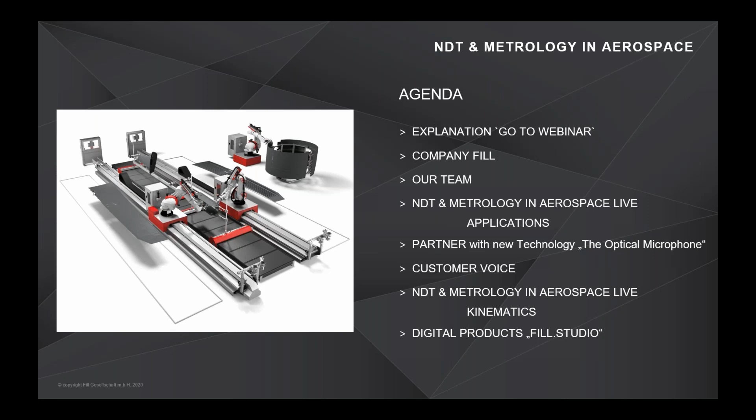Good morning. My name is Elisabeth Dötzlofer-Ferry. I am Sales Assistant at Fill, and we would like to welcome you to our webinar, Accubot-based ultrasonic X-ray inspection and geometrical measurement systems. In the next 60 minutes, we will show you the highlights of these systems. Before we start, we will explain the tool, briefly introduce the company, the team, and then we start with the presentation.

I would like to introduce our team before we start. Our specialist, Thomas Gramberger, will showcase today the highlights of our newest developments in automated NDT and metrology for aerospace. Balthasar Fischer, the CEO and founder of XARION, will introduce his unique alternative for dry inspection, the so-called optical microphone. And we are happy to welcome Jakov Sekelja from GKN Munich, one of our customers who is using an industrialized NDT system based on Accubot since 2018.

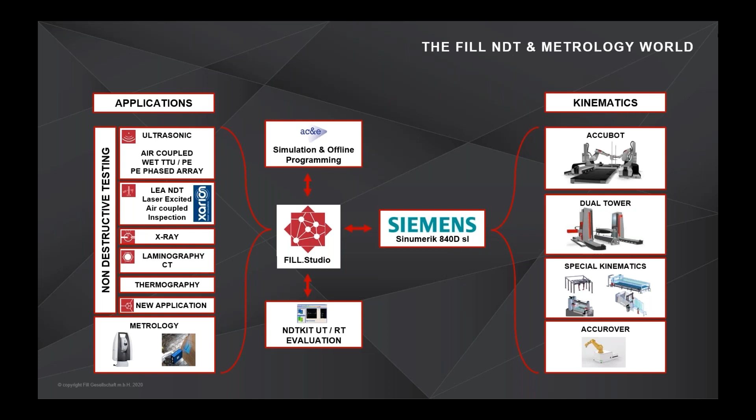Hello everybody, my name is Thomas Gramberger and I've been working since 2009 at Fill. I started my career as a software engineer, and for a few years I've been taking care of the NDT business together with my colleague Wolfgang Hase. Today we would like to present you the so-called first application and kinematic independent aerospace NDT approach powered by Fill Studio. What does that mean? I will show you in the next few minutes in more detail.

We call this multimodality. Multimodality means that in the end, the customer and the operator of the system should not have to care about which technology or which kinematic needs to be operated. For the user, the look and feel of the machine, how to operate the machine, is always very similar. So we try to integrate as many different NDT processes and metrology processes in our framework as possible and make it very convenient for the user to work with it.

Today, we would like to show you several different applications, starting from ultrasonic, followed by X-ray inspection, and later I will show you the metrology process in more detail. Before closing the event, I will talk about the Accubot system and our digital solutions, because Fill Studio is our digital framework for combining all these different technologies together. Okay, now let's start, and please follow me. Our plan is to start with the ultrasonic.

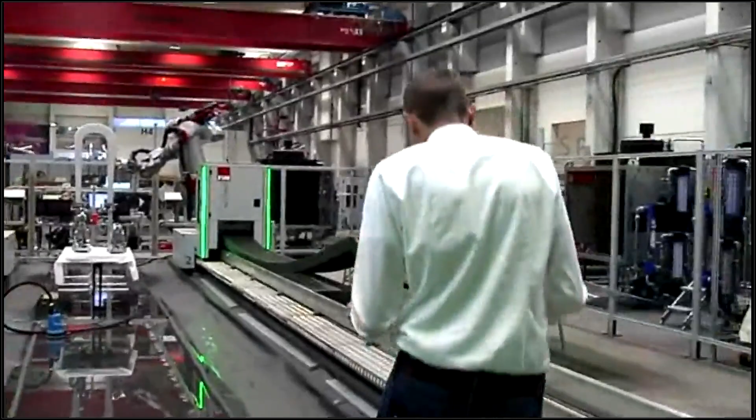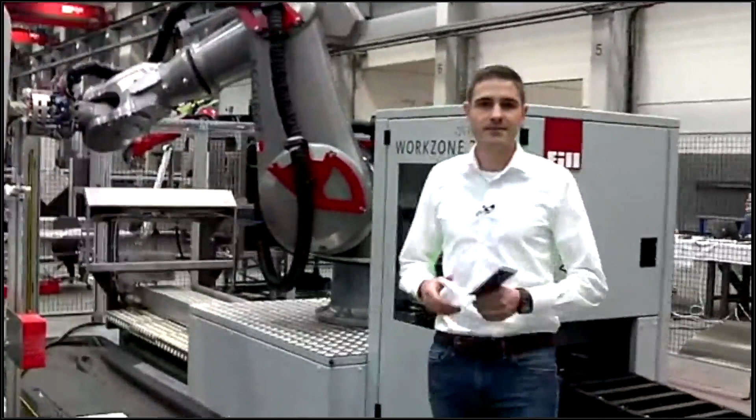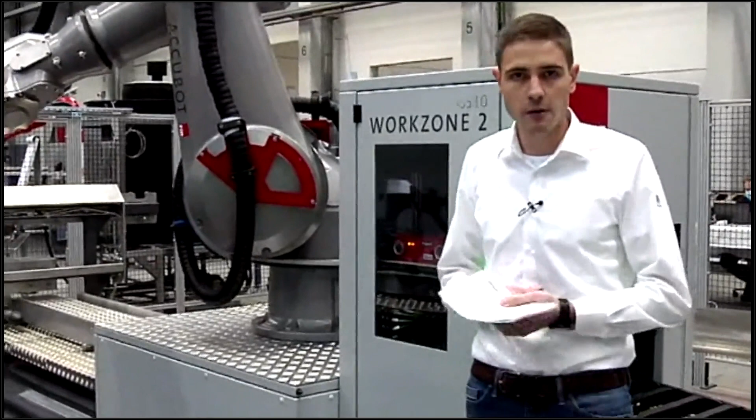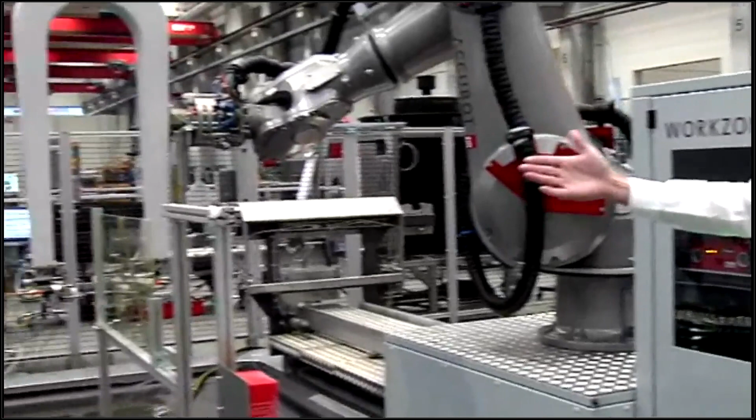Okay, let's start. The visible setup here is a typical setup of a dual robotic system, mainly for ultrasonic inspection. But as you can see later, we have included the metrology application here in a very light stage as well. The first robot has mounted a so-called metrology tool, which is actually a structured light camera, and the camera is acquiring 3D point clouds. We use this in referencing mode to determine the position of the specimen inside the inspection area and to avoid any manual teaching processes.

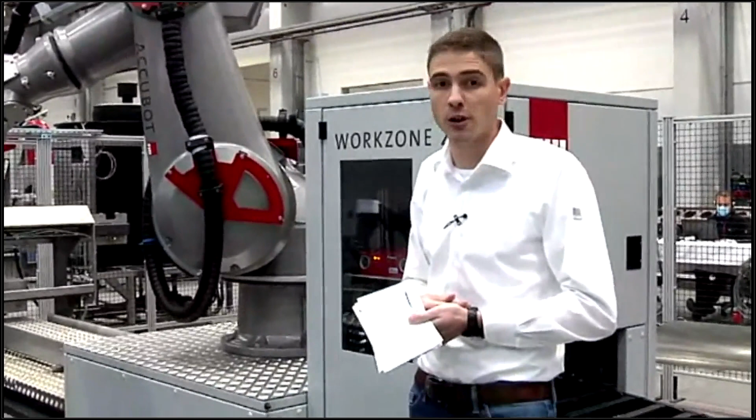So robot 1 is working totally independently from robot 2. Robot 2 in this case is guiding a fork and is performing through transmission ultrasonic inspection. For simple 2D parts, through transmission inspection is even possible with only one robot, as you can see here. As soon as we have bigger parts with highly curved surfaces, we might need to move to the dual robot setup.

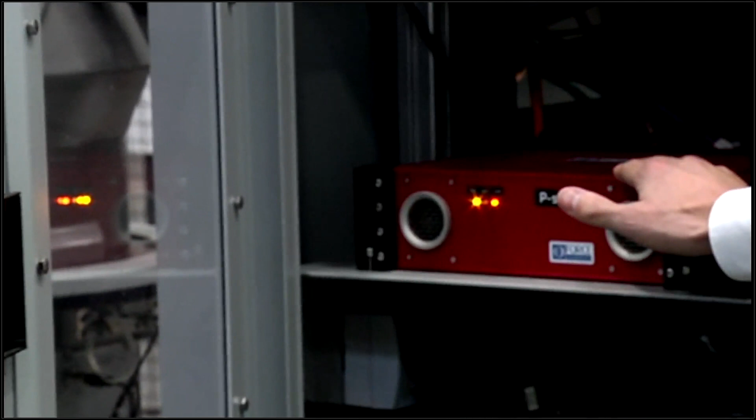Okay, now I would like to go more into detail about our ultrasonic solution. The small red box, which is visible here, is our UT electronics. It's from our partner and supplier Force Technology from Denmark, and it provides 8 high dynamic single channel ultrasonic channels and is able to perform phased array inspection as well.

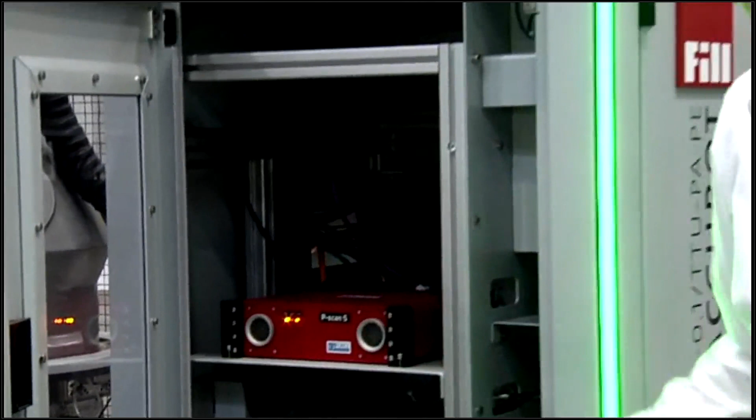For through transmission inspection, the single channels provide very high dynamics. So with 1 megahertz, we can reach up to 120 dB usable dynamic, and with 5 megahertz, it goes up to 115 dB, which is quite a lot, especially for high damping materials.

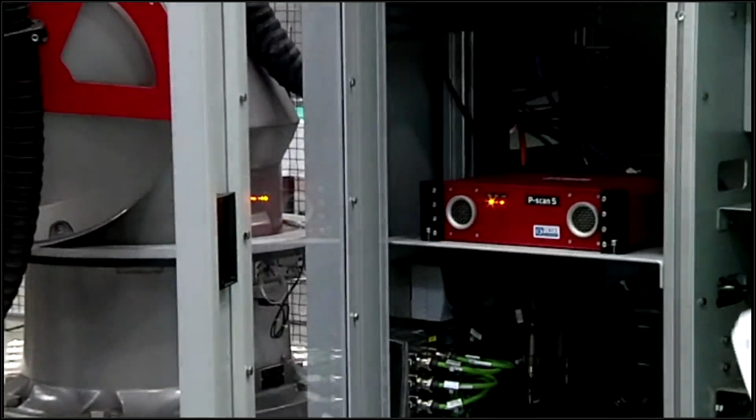Then we have a high linear resolution with acquisition in 24 bits, and a highlight is even the integrated burst pulser, which allows the through transmission inspection of highly damping materials.

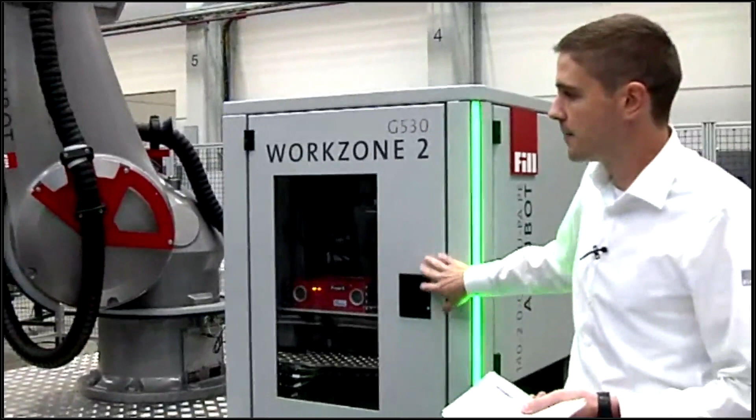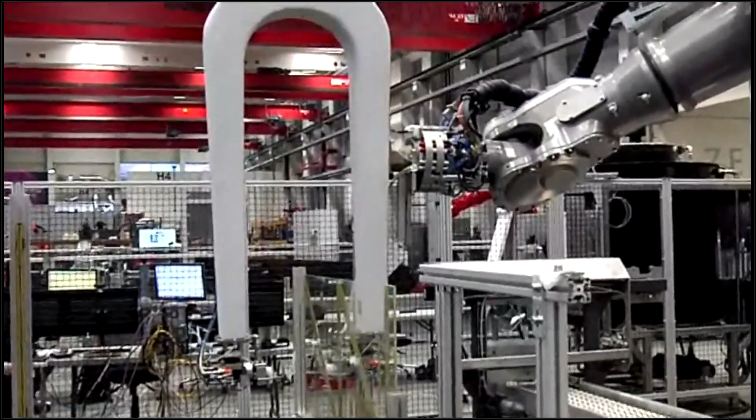Another unique feature is the dual frequency inspection. As you can see in this test setup, here we are inspecting an AITM hysteresis test panel, and this setup provides a dual frequency setup, and that means we can inspect in 1 and 5 megahertz simultaneously in one scan.

Especially for through transmission inspection, the unique and high inspection speed of up to 2 meters per second is quite impressive. For reaching such high inspection speeds, our maximum pulse repetition frequency of up to 4 kilohertz is mandatory.

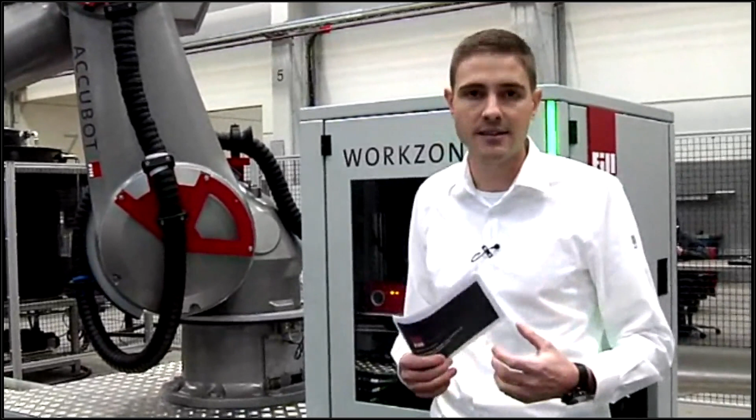As soon as the UT acquisition has been done and the scan has finished, we need to move over to the evaluation of the UT data. Therefore, we are working with our partner Testia and their product NDT Kit UT, which was formerly known as Ultis. This tool provides sophisticated evaluation and reporting functionalities, and we are working with the NK3 format, which includes the full 3D data together with the acquired A-scan and UT data.

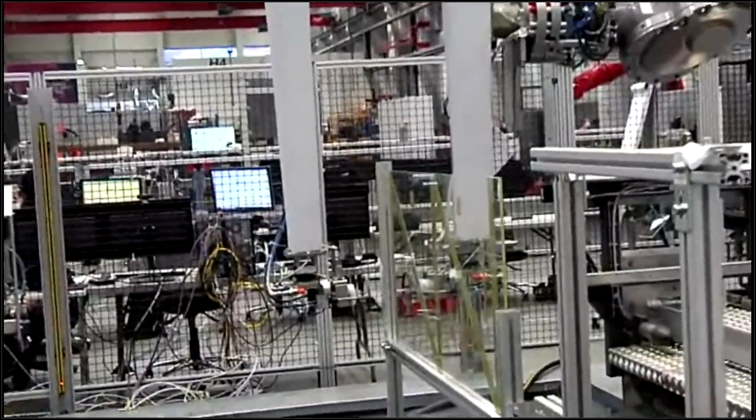For UT inspection, we even provide phased array functionality. The highlight of the phased array board of this UT device is the high conversion rate of up to 120 megahertz. This is especially interesting for thick solid materials in phased array inspection. And we can support transducers with up to 128 elements.

What we have as well is our so-called flex change tool changer. I will explain it more in detail later. With this flex change, we can easily, fully automatically exchange between different tools and applications. As you can see here, starting with this so-called narrow access tool. This is for through transmission inspection of very confined spaces. As you can see here, we have a small nozzle which can rotate. This is fully implemented in the kinematic structure of the Sinumerik controller.

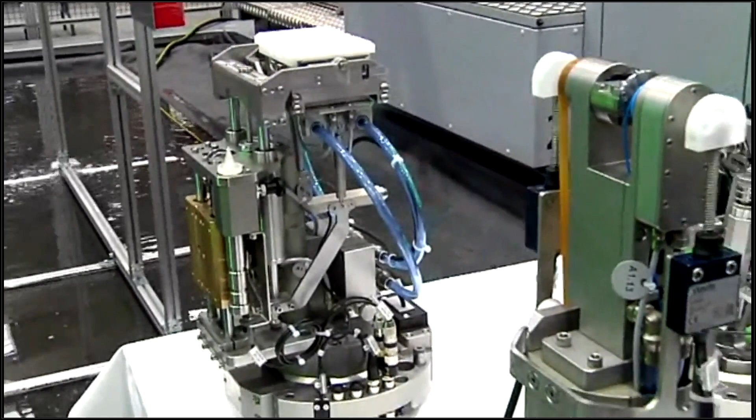This is a flat slider for phased array inspection of flat and slightly curved parts with 64 elements in this case. And we have even designed dedicated radius inspection tools for outer and inner radius inspection. And all these tools can be exchanged fully automatically.

As we have talked mainly about wet ultrasonics right now, we are even partnering with companies who supply the technology for air-coupled UT. In this case, I would like to mention our partners Sonotec and XARION, which both deliver very interesting technologies for dry inspection.

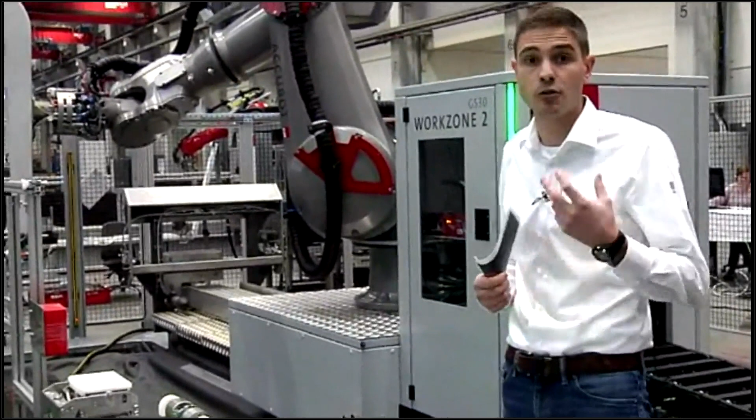Okay, now I would like to hand over to Elisabeth because we move to the next part of the machine. So, Thomas is now moving to the next system, showing the X-ray and metrology application. In the meantime, you can read some more features of it.

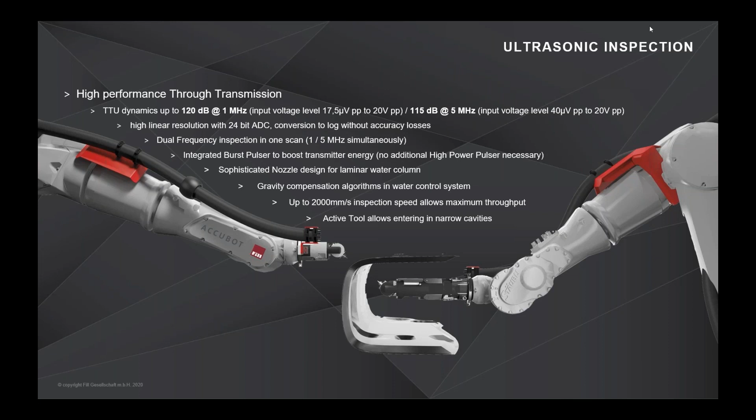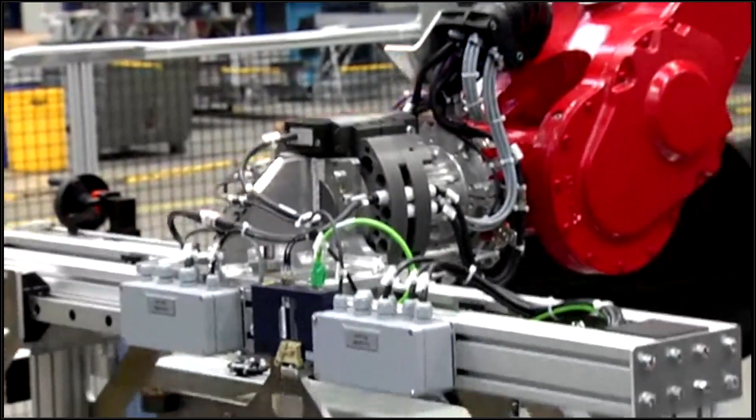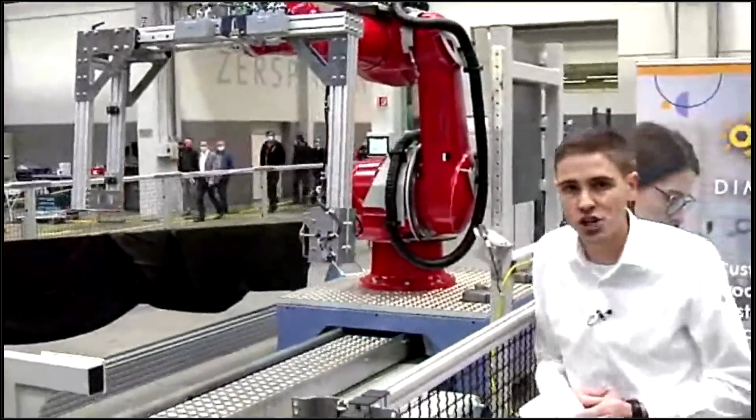Now we have moved to the next system, which is still based on our universal architecture, the high precision robot Accubot, but here we are showing a different technology. It is X-ray inspection. In this case, the customer has decided to include an additional application to justify the investment for the X-ray robot. And in this case, it is the metrology application to perform high precision geometrical measurement of the part, contactless for sure.

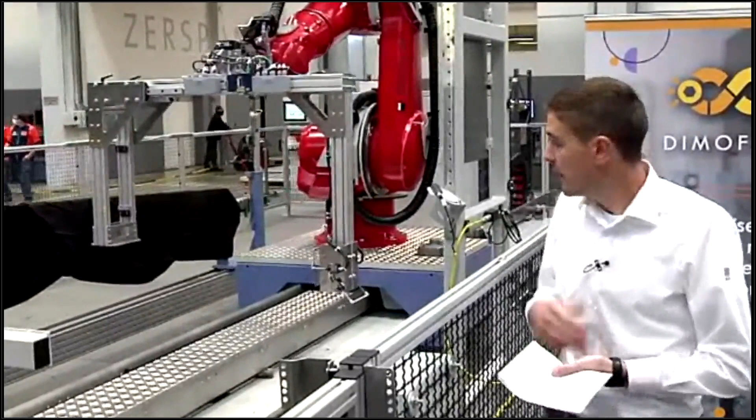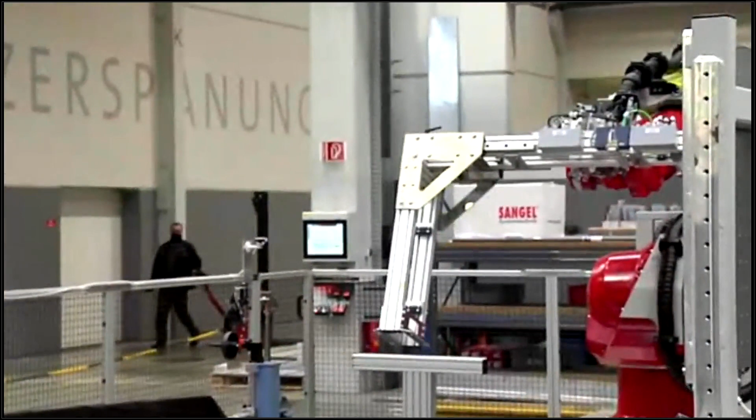Now the robot is starting with the X-ray inspection. Here the system is equipped with a 130 kilovolt microfocus tube. The tube is right now not mounted because as we do not have any bunker here, we are not able to perform real radiation. But nevertheless, you can imagine the X-ray source on the right side of the fork here. So the robot is starting with the X-ray inspection. The X-ray trajectories have been generated by an offline programming and simulation system based on CATIA data.

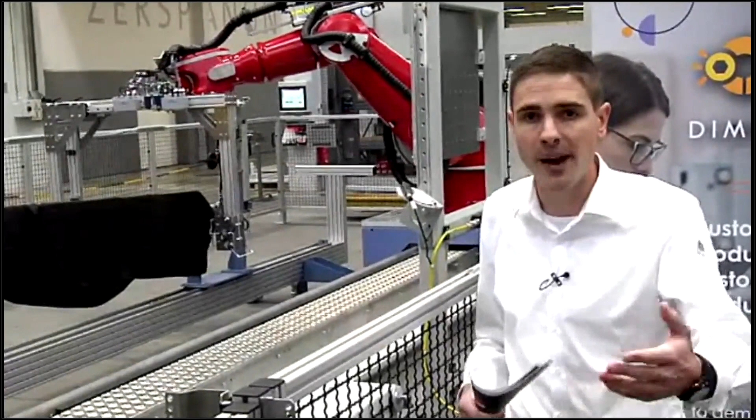But what is very innovative in this case is that we combine the digital data coming out from the simulation, the trajectories, with manual corrections done by the joystick, as commonly known from legacy systems, because today most X-ray systems are controlled only manually by joystick.

Here we have a so-called assisted mode, because if you would like to inspect honeycomb areas, like here with this aluminum trailing edge, it is very important to be perpendicular to the aluminum core areas. As this perpendicularity cannot be granted due to some production tolerances, it is not sufficient to rely on the OLP data. So the operator can manually correct the OLP data, and all this acquired data will be fed back into the engineering loop in the OLP system, and the system can learn by itself. So the whole process is based on the newest digitalization strategies.

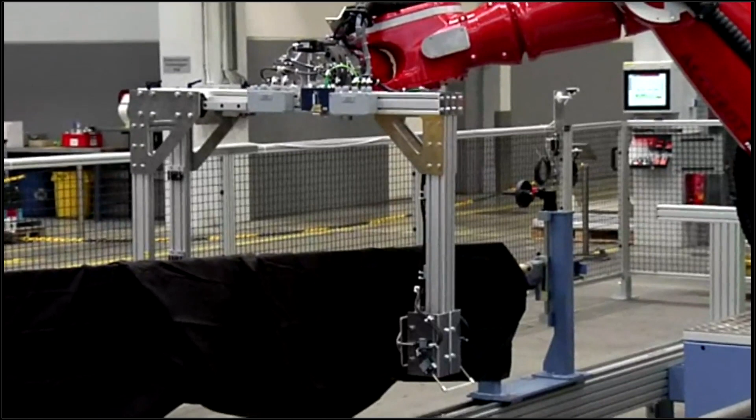As you can see here, there are no visible vibrations. So immediately after moving to the next acquisition point, you have a sharp and crisp image generated by the digital detector. By the way, for the X-ray technology, we are working with our partner VisiConsult.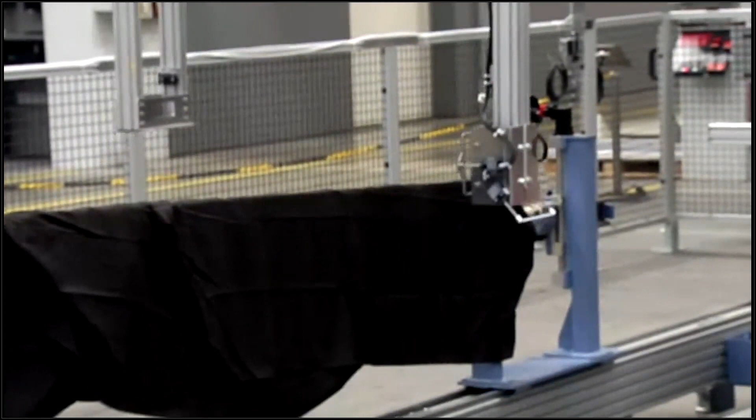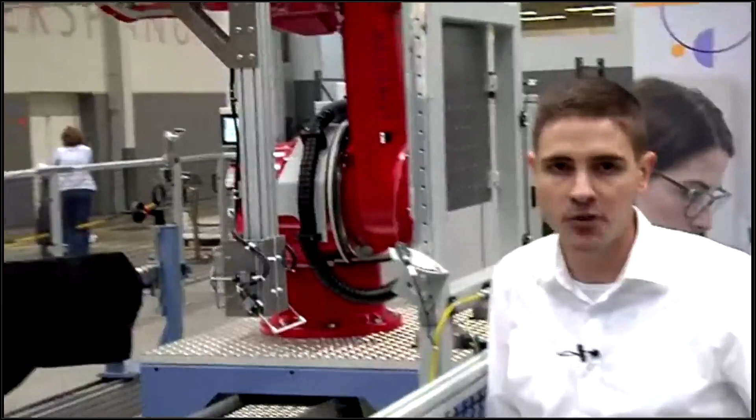Okay, now as soon as the X-ray procedure has been finished, the robot is automatically exchanging its end-of-arm tool to the metrology tool. As soon as the changing procedure has finished, I will explain more in detail about the metrology application. We have a small defect marker integrated in our flex change tool changer as well to highlight some regions of interest on the specimen. You can see this defect marker now.

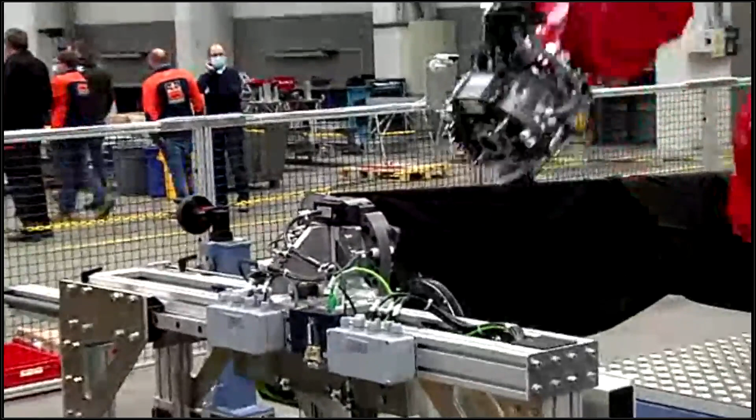As soon as no tool is mounted, it is just a small pneumatic actuated defect marking tool based on an inkjet. Now the robot is picking up the metrology tool. So the metrology tool is basically equipped with two different sensors. One sensor is a 3D point cloud sensor based on structured light technology. And additionally, we have equipped the end-of-arm tool with a high resolution 2D sensor with 25 megapixels for a dedicated region of interest inspection. So basically, the procedure is like this.

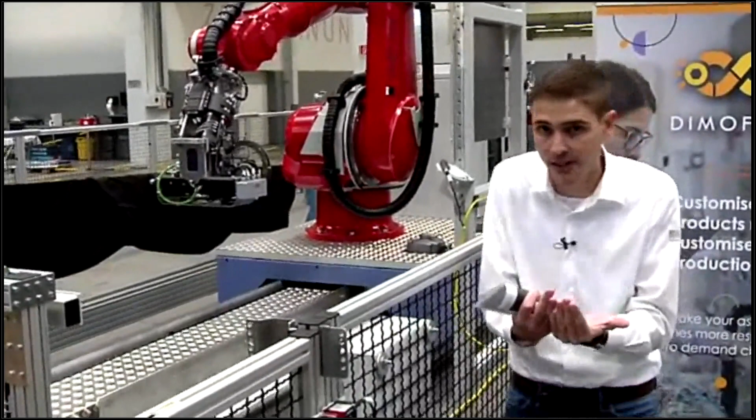All the trajectories are programmed in the offline programming system based on dedicated visual inspection algorithms, because we need to guarantee some overlap between the acquisition points. And then as soon as the structured light sensor is acquiring 3D point clouds, we are just merging all these different point clouds together. So the whole set of point clouds will now be combined, meshed, and then we perform a comparison with the original 3D data. At the end, the customer gets a fully automated generated report about all the deviations and thresholds and so on.

What is very important here is that we do not rely on photogrammetry technology here. We rely on the high positioning accuracy of our Accubot system, which is unique, and therefore we can avoid relying on some specific features on the part to align the different acquisition points together. So we are not depending on any features and patterns on the part to align the different point clouds together. And as mentioned before, for example, for drill hole diameter inspection, we use our 25 megapixel 2D vision sensor.

As you might see now, the blue light is the structured light which is being projected on the part, and the sensor is acquiring the 3D point cloud out of it. And a nice feature of the system is, after finishing all the processes, starting from X-ray and metrology, we merge all the results together using our Fill Studio, and then we generate a measuring report containing all the different results of X-ray and metrology and ROI inspection of the 2D camera together.

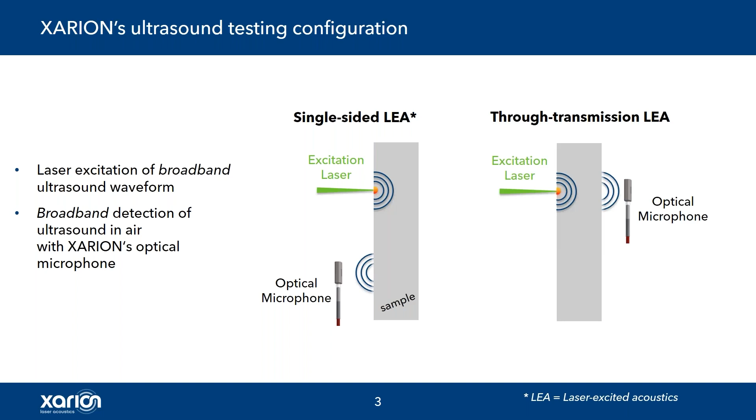There is a single-sided configuration shown here, where the laser excitation and the receiver are placed on the same side, and there is a through-transmission setup, a TTU, where we have excitation and optical microphone on opposite sides. I'd like to show two scan examples.

However, the nice thing about it is that it's completely contact-free, so no water, no gel, no liquid is used to generate the image. In terms of water management, it can be interesting because it might need less pre-treatment, especially if you deal with open core material, where you might have to close the surface against water ingress. So this is an application where it would make sense to refrain from a coupling fluid.

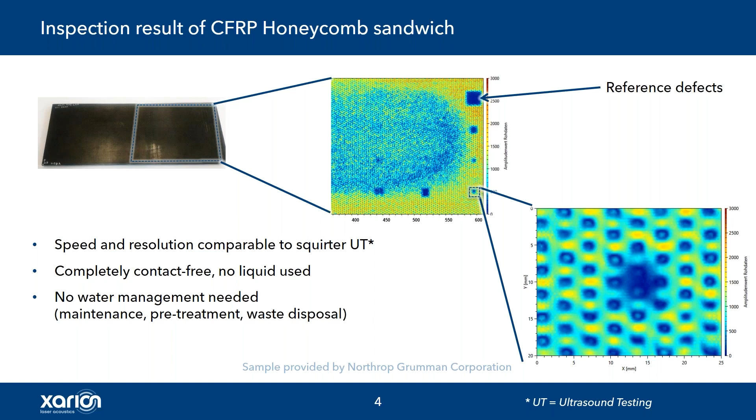I'd like to draw your attention to this little insert here. This shows a zoom of the smallest defect. You nicely see the honeycomb core, the single pores. We have a pitch of 3 millimeters, and centered in this insert, you see the smallest defect.

The second example is detection of porosity in monolithic carbon fiber material. If you acoustically ping on pores having a size of 1 millimeter or less, they tend to radiate an ultrasonic wave as a response. Our laser excitation is very broadband, and if we then use our optical microphone, which is also broadband in frequency, we can make visible the pores inside the material. So the key is to have a broadband excitation and a broadband receiver, because depending on the size of the pores, the resonance frequency will be in the few hundred kilohertz range.

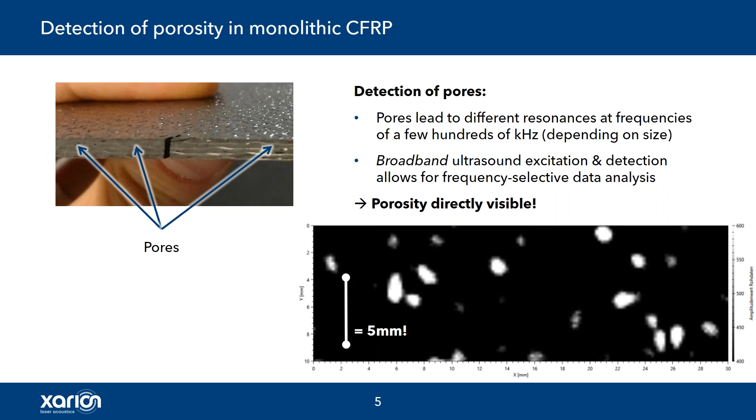Let me do a little bit of a comparison. If we compare laser-excited acoustics to squirter, one thing you need to keep in mind is laser safety. We need to take laser safety precautions.

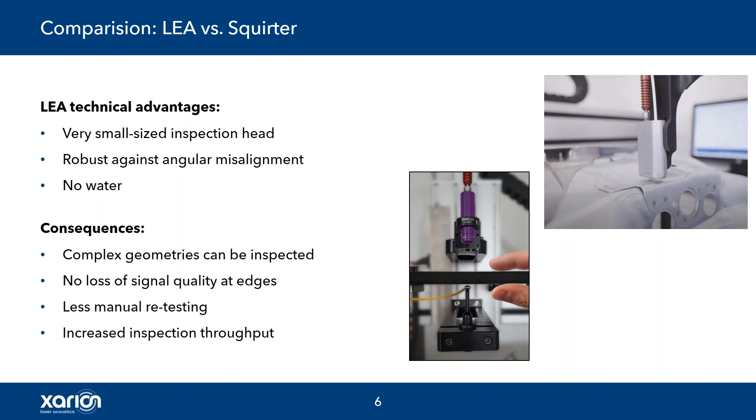So nowadays it's possible to have a rack-based unit at much lower cost and obviously much smaller size. Our setup is purely fiber-based. The entire inspection head is shown on the left-hand side in the image. It contains the generation and the receiver of the ultrasound.

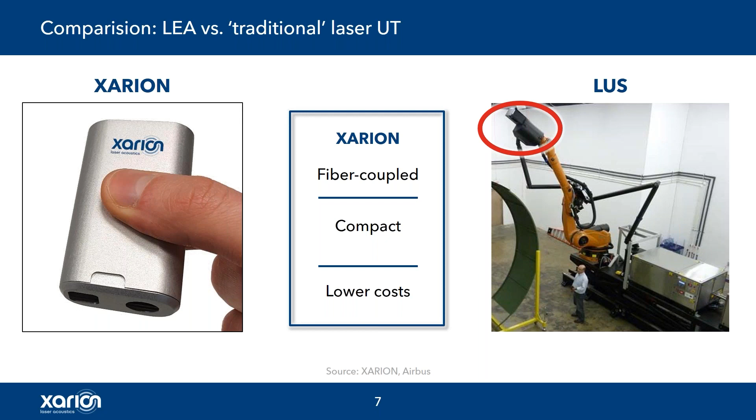But it's not only the resolution, it's also the speed. We can have up to 5 kilohertz of pulse repetition frequency, so obviously that means high speed. And last but not least, a very high frequency bandwidth. In one scan, you capture the entire frequency bandwidth expanding from 50 kilohertz up to 3 megahertz.

So you don't have a center frequency, but you have really a broadband signal. And then after the scan, you can decide whether you want to apply a digital filter and look for a specific feature at a specific frequency. So it captures all at the same time.

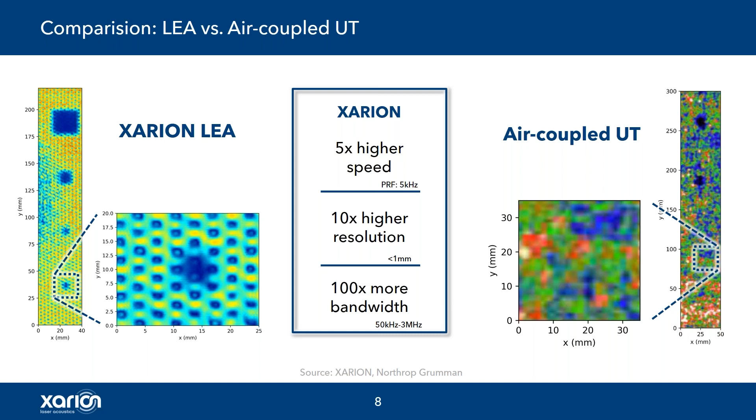Let me close by summarizing briefly. It's a fiber-coupled sensor head based on laser-excited acoustics. It's compatible with the FILL standard industrial robots. It's basically a plug-and-play setup which has been tested at the FILL facility. It well fits into the FILL robotics environment, and the AITM for the Airbus qualification is right now underway. Thank you very much for your attention.

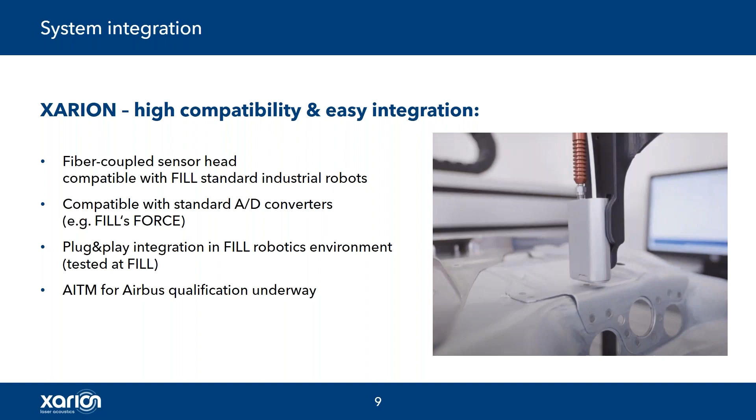Hello, my name is Jakov. I'm the head of quality assurance here at Aerospace site Munich.

We had in the past an old ultrasonic equipment that was built in 1986. It was modernized several times, but even with all the modernization, it's not reliable in the long term. So we decided in 2017 that we would go for completely new equipment, but the difficulty was that the ultrasound is embedded in the middle of the production area and should stay there.

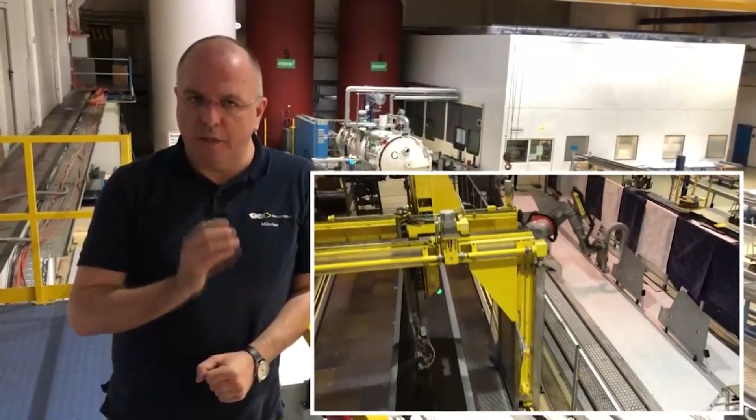So we didn't have the possibility to move with the new equipment to another area. We decided to build this new equipment more or less parallel to the old equipment. We left the old equipment at the site where it was, built the first robot parallel to it, started with setups and qualification, and as soon as we finished all the work necessary for the aerospace business, we decided to scrap the old equipment and use Robot 1 for production.

So we didn't have any impact on production during the whole build-up and qualification phase. After the old equipment was scrapped, we started the build-up of Robot 2. This happened in 2018. After it was finished, we also qualified Robot 2 for all the parts we had already qualified on Robot 1.

Why have we done this? Why have we purchased two robots? The main reason was we needed reliability. In the past we had just one piece of equipment, and during a breakdown, everything was down. We had a single point of failure, and the whole production was stopped. With two robots, we have the opportunity to keep inspecting even if one robot is defective, just setting everything up on Robot 2 and vice versa. That was one of the reasons.

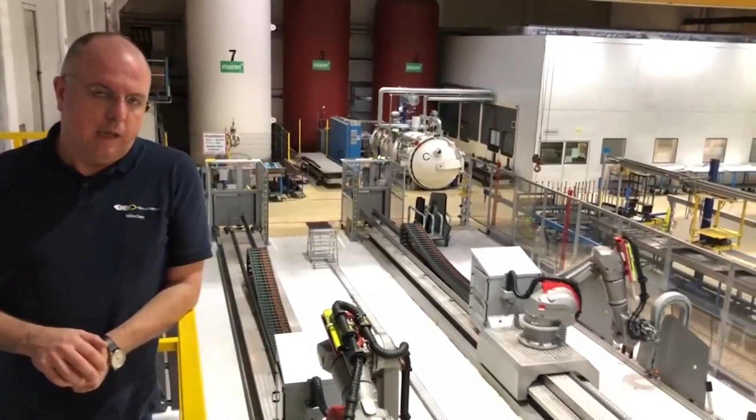Second thing was we implemented three working areas: one in the middle where the robots can do cooperative work, and on both outer sides of the robots we also have the possibility to do further work. Also, with the safety system included, we are able to set up parts in one area, and during this time, if the other section of the robot is not affected, you can still inspect on the other side of the area without disturbing the robot in its inspection. So we are far more flexible.

Also, the technology of these robots has been improved. In the past, we used state-of-the-art technology for that time with single channels, but meanwhile we are on very fast phased array technology. In the past, we needed about 100 minutes for one of our large parts in full sector, and now we are down to 8 minutes for the same parts. This is a great improvement.

There is, of course, a question: if you managed to do everything in the past with one machine at that slow time, now you have two machines and are far faster—are they actually fully utilized? Do you have enough parts here to work?

Yes, because we could go down to just one shift. From a three-shift model, we are down to just one shift. We have reduced our personnel here because everything is done quickly. And second, you have very precise robots, and you can also utilize other inspection methods on the part.

Everything else can be solved by external software from the laser tracker, the scanning equipment, and so on. To simplify the utilization of such a complex system, we have reduced the software to the essential issues operators need. In this case, just scanning the material number from the traveler or work order, and the serial number. It is possible to exactly say which program will be used, in which safe location it will be, and everything else needed.

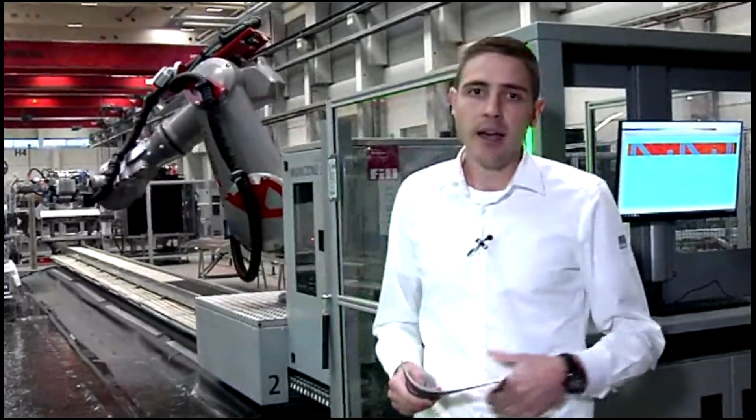Now I would like to tell you more about our Accubot system. The Accubot is a high precision robot driven by a Siemens numeric controller. To reach these extraordinary absolute positioning accuracies, we have applied secondary encoders to all the robotic joints.

We buy the robotic arm from Stäubli, which is our supplier. Stäubli delivers very reliable, precise, and waterproof kinematics. We combine this kinematics with the openness and performance of the Siemens numeric controller. This gives us a lot of flexibility to extend and modify the kinematics.

As you will see in one of the next scan lines, we have implemented the so-called active tool, which allows an additional servo motor or axis to be added at the tip of the robot, on the end of arm tool, fully integrated into the kinematic chain of the robot.

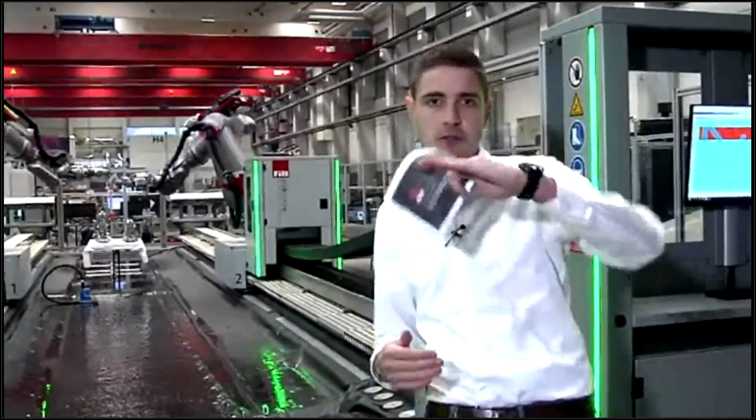In a few moments, you will see the active tool move to the next position. Until we reach that point, I would like to talk more about the high precision of the Accubot. We include external encoders on all axes to eliminate and reduce mechanical backlash of all the gears. Even thermal effects and wear effects of the gears are totally eliminated, which drastically reduces the repeatability deviation of all the single joints.

Additionally to the external encoders, we implemented a real-time compensation based on a laser tracker. For the initial calibration, we place a laser tracker in the inspection area, and the kinematics model of the real robot is identified, because the real robot will differ from the ideal nominal CAD model. This calibration is later calculated in the real-time cycle of the numeric controller to compensate for all the geometrical deviations we are facing.

Now you see the active tool has moved to another orientation, and the robots are continuing the inspection in a new constellation.

What you can see here is the inspection speed of 2 meters per second, which is quite impressive. Especially important here is that the trigger rate, the maximum pulse repetition frequency, is up to 4 kilohertz. All these different tools you have seen before - the phased array tools, the X-ray tools, the metrology tools - are fully automatically exchangeable with our flex change tool changing system, which is visible here as well.

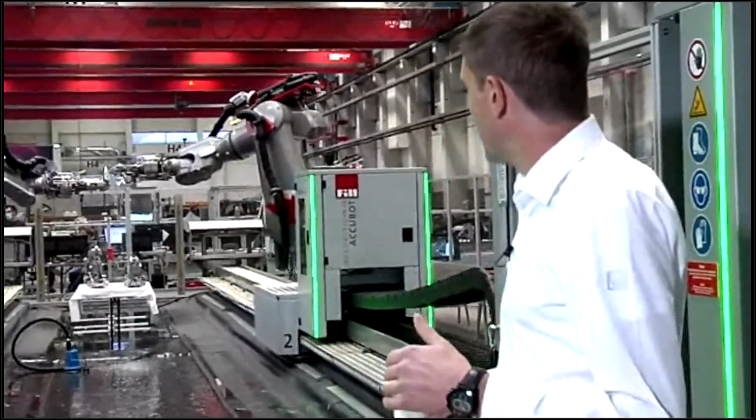Okay, now I would like to move on and go into more detail about our digital solutions. Just follow me. What you see here is our so-called Fill Studio, our application and kinematics independent framework for NDT inspection systems.

We have integrated several tools specially designed for the dedicated process. For ultrasonic inspection, we have dedicated path planning algorithms. We have the same for X-ray inspection and for metrology inspection. So we try to combine all these different applications in one tool.

So at the end, for the operator, it does not matter whether he's operating a robotic system, a gantry-based system, or any other special kinematics. In the same way, we try to implement different applications so that the look and feel of the software is always the same for the operator, no matter whether he's operating an ultrasonic system, an X-ray system, or a metrology-based system.

Our Fill Studio supports even a huge variety of state-of-the-art protocols to communicate with ERP systems on plant level, based on MQTT, OPC UA, and all these new standards, which are used for the new IoT and Industry 4.0 technologies.

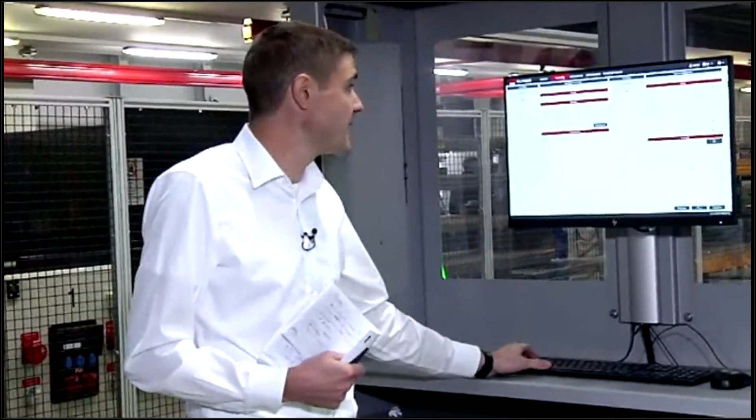What we have as well is a fully implemented digital twin based on VNCK. Here, this is another feature where we utilize the performance and the power and the flexibility of the numeric controller. We have integrated the digital twin to perform cycle time analysis, collision avoidance, singularity avoidance in parallel to a running inspection. So this is quite convenient for all users to utilize to a maximum machine utilization.

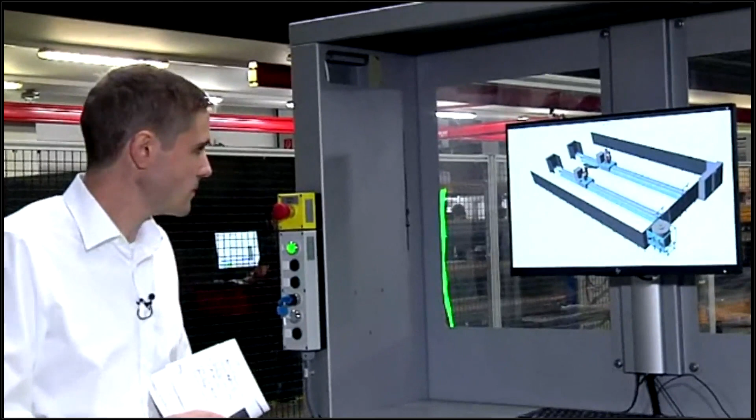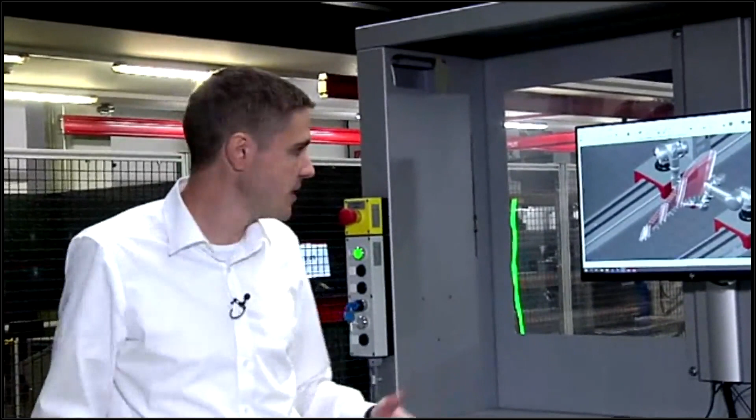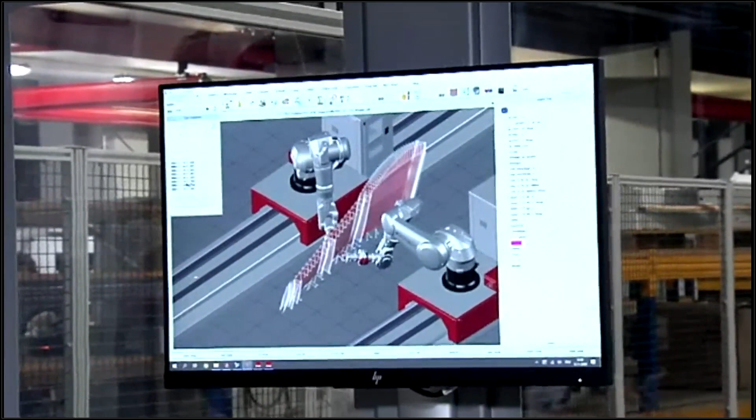We have even implemented our active tool in this offline programming and simulation environment, and then we can easily program and simulate all the scanning trajectories in parallel to the running system. So no need anymore to interrupt a running inspection on the real system.

In our Fill Studio, I would like to show you some nice feature, because in the beginning of the webinar, you have seen that we have worked with the metrology feature. Robot 1 has just acquired a point cloud of the specimen, which has been inspected by Robot 2. And here you see the result of the point cloud.

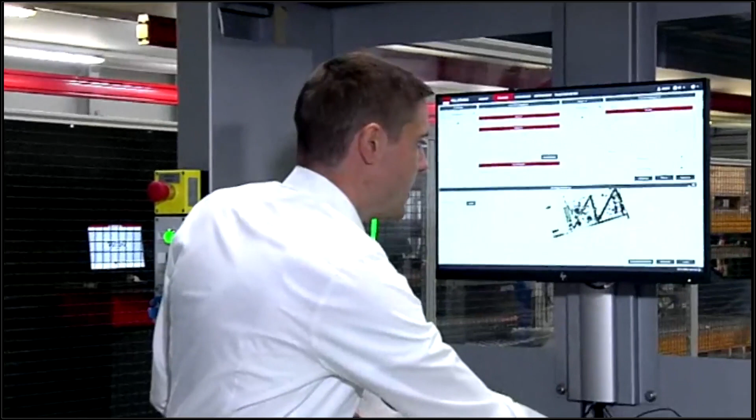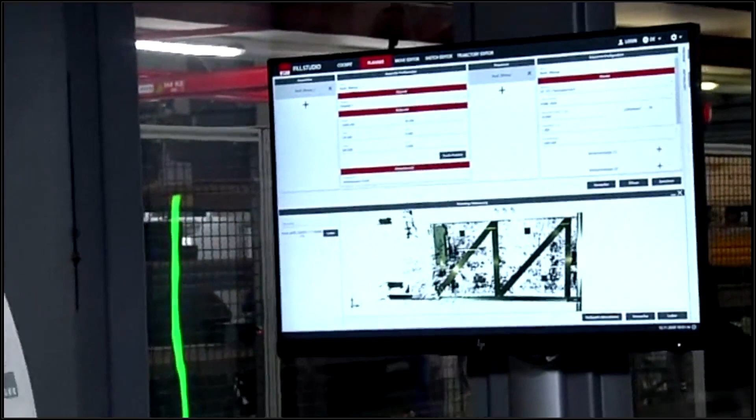Here you can imagine the AITM reference panel. If you are a UT expert, you may recognize that this is the AITM reference panel, and we can easily adjust our reference to this acquisition point cloud, and we can immediately start the scan without any manual intervention or manual teaching. So metrology is fully implemented in Fill Studio as well.

Another nice feature is the multi-station capability. Just imagine the two robots are working independently from each other. Robot 1 is doing a phased array inspection in work zone 1, for instance. Robot 2 is performing phased array inspection in work zone 3, absolutely independent. Each robot has its own Fill Studio instance to be controlled by Fill Studio.

But even if Robot 2 is still doing an independent job, you can already start here through transmission inspection with two robots in the middle of the three inspection areas. And Fill Studio is automatically coordinating the resources between each other. So as soon as Robot 2 has finished its job, Robot 2 will be assigned to Fill Studio of Robot 1, and they are doing their automated cooperating job.

Okay, I hope you have enjoyed this presentation, and we were able to give you an insight about our latest developments in automated NDT and metrology for the aerospace industry. And we are looking forward to discuss with you your personal requirements, and see you soon.